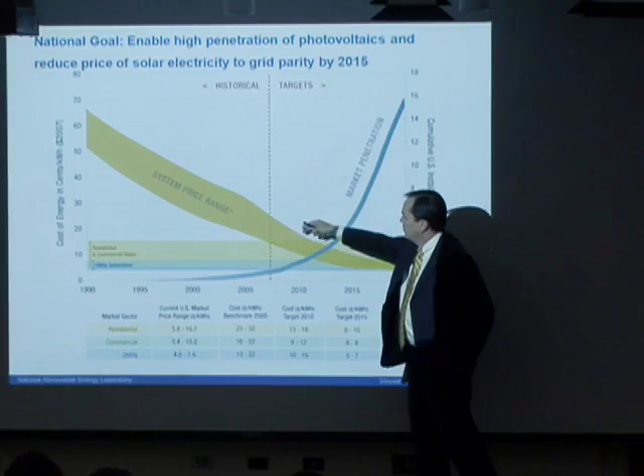I am going to look at the question of what happens as we begin to grow this industry fast enough to become significant. So let's first take a look at the national goal of what we hope to do. Today, photovoltaic systems can provide electricity in the range of 20 to 30 cents a kilowatt hour in many locations around the United States.

I guess I should practice using the pointer. So that is a number that's about a factor of 2 above where we want to be for residential electricity prices. Commercial systems are slightly lower than that. And on the utility scale side of the meter, the numbers need to be substantially below that. So we're a factor of 2 to 4 away from where the technology needs to be to run without any kinds of subsidies.

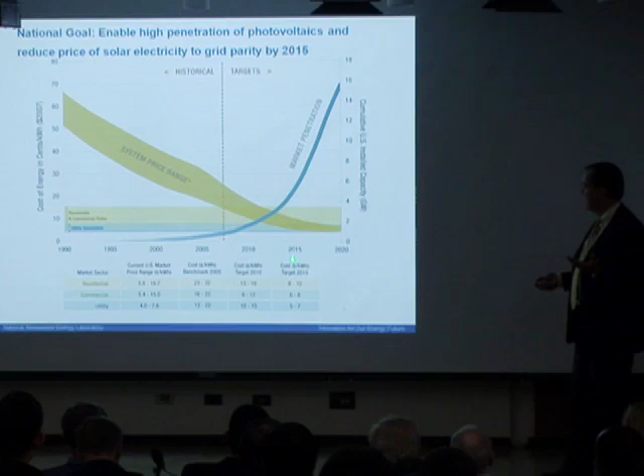In the fall of 2008, Congress passed an 8-year investment tax credit that provides a 30% subsidy for the installation of photovoltaic technologies. Interestingly, that's going to expire around 2015, which is where our targets are. So the idea is that about the time that tax credit's expiring, we expect that PV will be at a stage where it can run on its own.

Many people in the industry think that for some markets in the US, they'll be able to beat that target substantially. And certainly with the recent price drop on PV systems throughout the country as a result of the current economy, that potential is looking quite promising.

But even with this sort of a model, you see that the projected penetration here is only looking at a number of about 16 gigawatts overall.

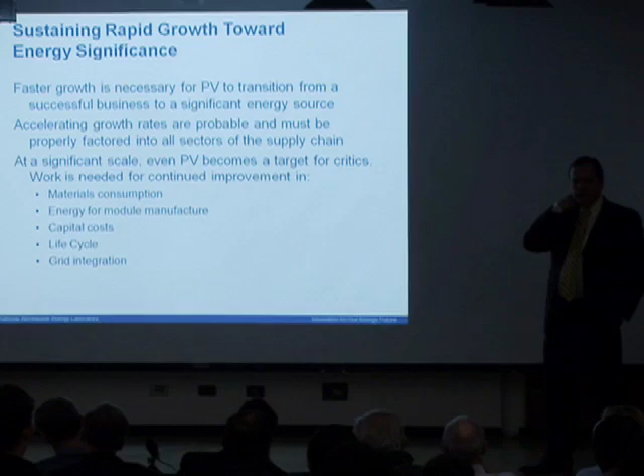We'll look at the energy consumption for a module. Typically today, a photovoltaic module has an energy payback period of about 2 years, which means that with a 30-year lifetime, it provides 15 times as much energy over the life of the module as it took to produce that module. There's some of the challenges of raising the capital cost, life cycle issue, and then the biggest challenge of all: how do you tie this significant amount of power into the grid?

So I gave a summary to one of my hosts here and said, as you look at it, if we don't make some improvements, I've spent my career working in a photovoltaic technology that will be net cash flow negative, consume more energy than it produces, contribute a lot of toxic materials to the environment, and produce electricity that the utilities can't use. It's a great career so far.

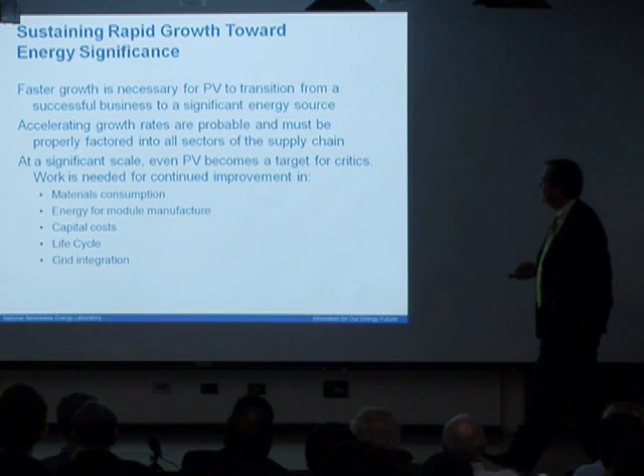But there are solutions out there, and we can achieve those. So we'll take a look at what guides some of the projected growth in photovoltaics and the industry as a whole. This is data from the Energy Information Administration that we'll use to project where we need to be.

It's the old adage that it's important to know where you're headed, because if you don't, you may not know it when you get there, from Yogi Berra.

But here is an analysis they've seen of photovoltaics, and from this 2009 report, they're saying that from an installed base of 30 megawatts in 2006, they're projecting growth to 381 megawatts by 2030. Of course, more than 400 megawatts are installed today. So these are some of the challenges of registering data and projections at the national level in a way that we're all working from the same songbook.

But if you look at the planned growth, the Energy Information Administration expects that electricity consumption growth in the United States will be substantially below that of the rest of the world. As you look at the 40% growth in photovoltaics, within about a decade we should, on a global basis, be approaching about 4% of total generating capacity.

Given that the US is really lagging the rest of the world, and we have a vibrant economic base, I projected that we may be able to grow a little faster than that overall, maybe a 50% growth rate, and steal some from the overall global markets, putting more of it here in the US, and hit a number of 7%, which sounds good until you hit one of the first constraints.

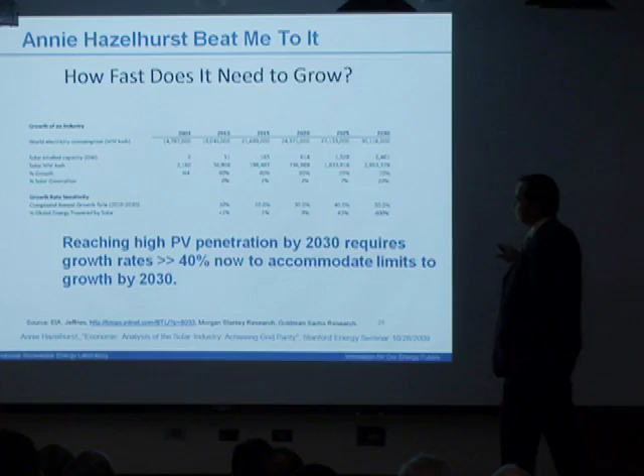But unfortunately, I'm a little late. This was a slide that Ms. Hazelhurst presented at the end of October, where she says essentially the same thing: you need to grow faster than 40% a year now in order to accommodate the limits to growth as you get on out here.

And this model starts with a growth rate around 50% in 2010 and ramps down to the point where in 2030 you're down at a growth rate of around 10%. So the challenge is, can we grow at faster than 50%?

The other thing is that the PV industry has a problem with regard to interaction with the investment community, with the business community. PV has sort of been widely considered to be a visionary technology that's probably not a very good business. The PV industry historically has underestimated its growth rate.

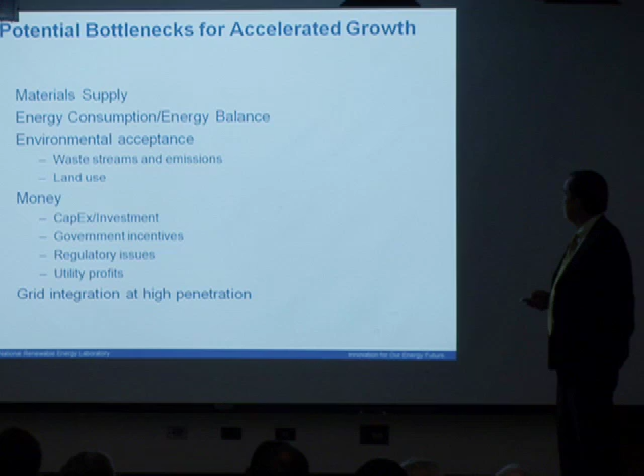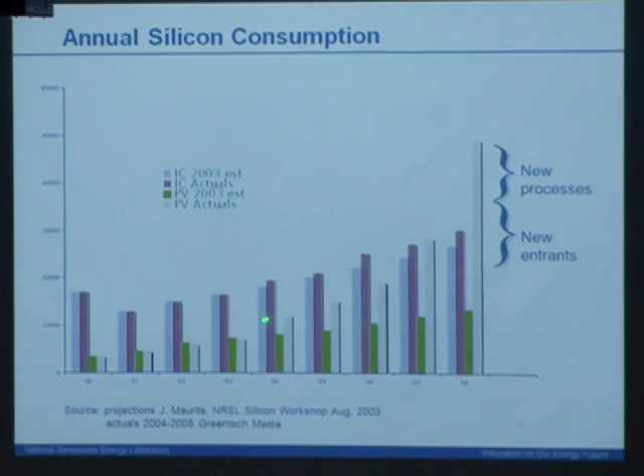What was happening in 2004 is the German government and several other European countries launched these feed-in tariff programs to stimulate the photovoltaic market. The overall industry grew to the point where the demand for photovoltaic silicon outstripped the demand for the ICs. You had a shortage here in 2005, 2006, but by 2008, new capacity, including some new processes for purification of the silicon feedstock, came online to meet that particular need.

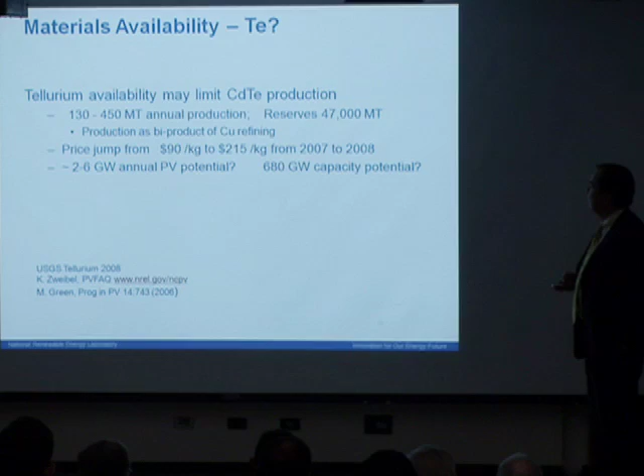Another major technology, one that Mike McGehee discussed last week, was the question of, can First Solar continue to grow as fast as they have? First Solar has been doubling their capacity every year rather than every 2 years for the industry as a whole. 2010 isn't going to see a lot of growth, but Mike's calculation that they probably consumed half of all the tellurium that was sold last year is very likely correct.

If you look at the change in prices of tellurium from 2007 to 2008, when First Solar production went up dramatically, you saw a large jump in that price.

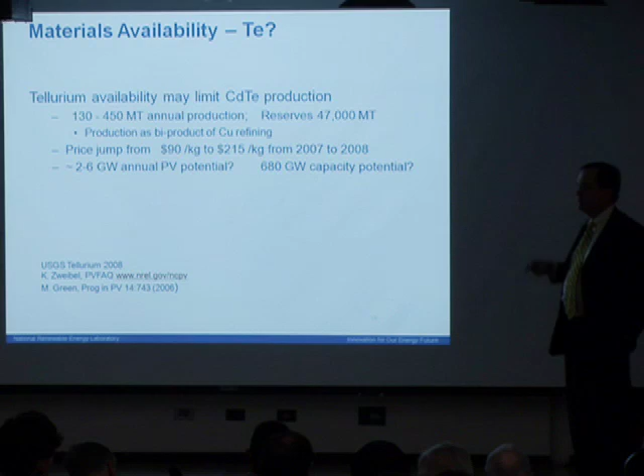So does this suggest that the cadmium telluride technology is limited to 5 gigawatts annually in total production? Or as Mike calculated, only 680 gigawatts? Well, that's a very big number. That's a great business for First Solar for a lot of years to come. But that's still only about 1/5 of the kind of number that we think photovoltaic should be able to provide. Well, there are a few things wrong.

A lot of this information is coming from the USGS, and the USGS is actually collecting and reporting data primarily from suppliers. If you look at their analysis of tellurium supplies, it's all coming as a byproduct of copper production.

Well, an interesting thing happened in 2008, when a company called Sichuan Apollo Solar discovered a completely new geology from which they extract a lot of tellurium. It provides an alloy of bismuth telluride that's quite abundant. Their plans as a corporation is to add another 50 metric tons a year to annual production of tellurium.

The other feature is this volcanic source opens up a completely new geology so that you can look for this material in other areas. And I think as Mike mentioned, the amount of tellurium in a cadmium telluride module is very small, so you can pay a lot for the tellurium in order to make more sources economically extractable.

But digging a little further into the USGS database, you take a look at bismuth, the other side of this particular compound. In 2002, their base reserve number for China increased by an order of magnitude. It's also, you notice, an order of magnitude bigger than the entire tellurium reserve, and yet this is a compound that is a one-to-one mixture of the two elements.

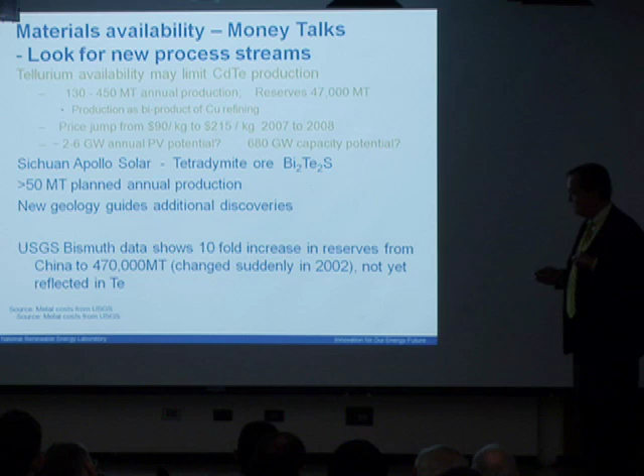Another side of this is that if I've got valuable materials in my module, that will also encourage recycling of those modules so that they're not left out in a disposal site. But the caveat is that you want this to be a small percentage of the total cost of manufacturing a module. Remember, we're trying to make photovoltaic modules for a total price well under $1 a watt. So for materials like cadmium, tellurium, selenium, gallium, and indium, contribution costs of 1 or 2 cents a watt are certainly in an acceptable range.

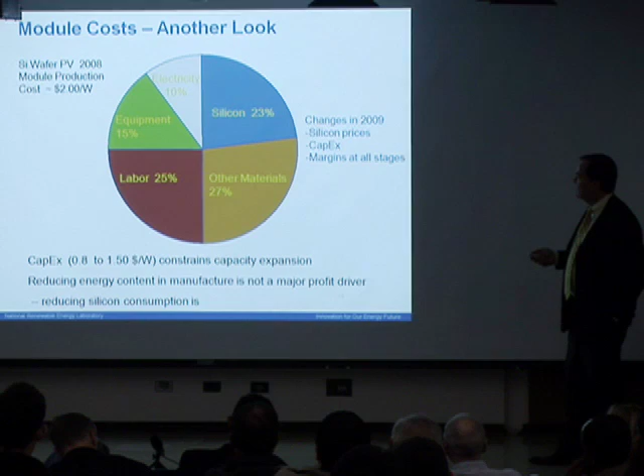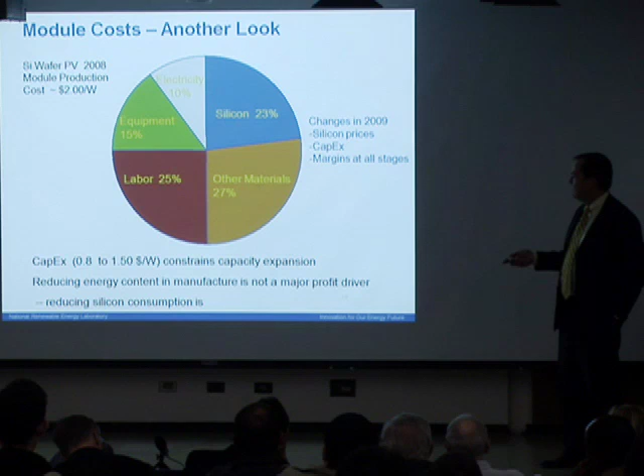But there are a couple of factors that really have a greater impact on the growth rate for this technology. The first is electric consumption, which we'll talk about later. The other is the cost of equipment. In this case, 15% of the cost of that module is due to the depreciation of equipment over a 7 to 10 year life of the factory. So what we're looking at is capital expenditures of 80 cents to $1.50 a watt for installing a factory.

So if you're building a 100 megawatt factory, it's going to cost you $80 million to $150 million to build that factory. This is a factory that's going to generate profits of maybe only $50 million a year. So you're going to be continuing to sink more cash into your industry in order to sustain a growth rate for the overall production.

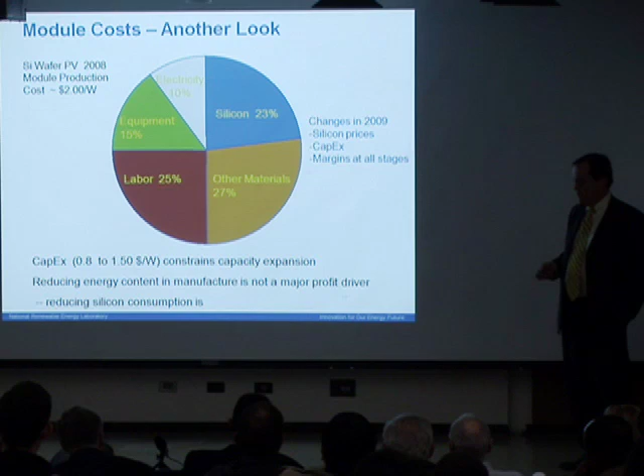The other factor that concerns me a little bit is with electricity being only 10% of the total cost of the module, this isn't a real big driving factor for bringing down the overall cost. But what we'll see is that in manufacturing a silicon module, the dominant energy consumption comes from making the silicon feedstock and the ingot.

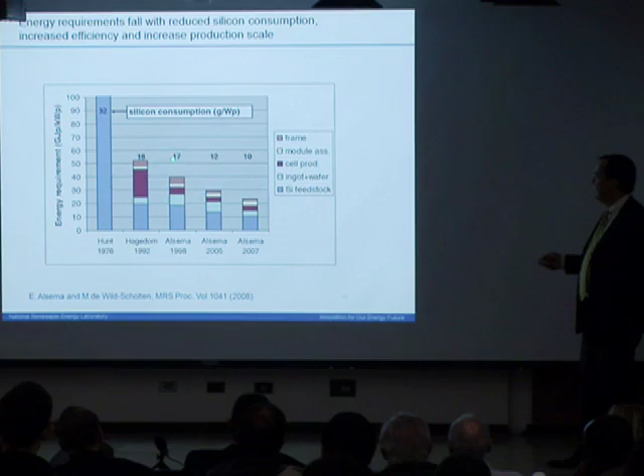As we look at the progress of the PV industry over the past 15 years, in the mid-1990s we were using 15 to 20 kilograms of silicon per kilowatt of module production. By the mid-2000s, that number was down to 10. Best in class today is under 6. So that driving force of knocking the cost of silicon out of the module is also knocking a lot of the energy intensity out of manufacturing that module.

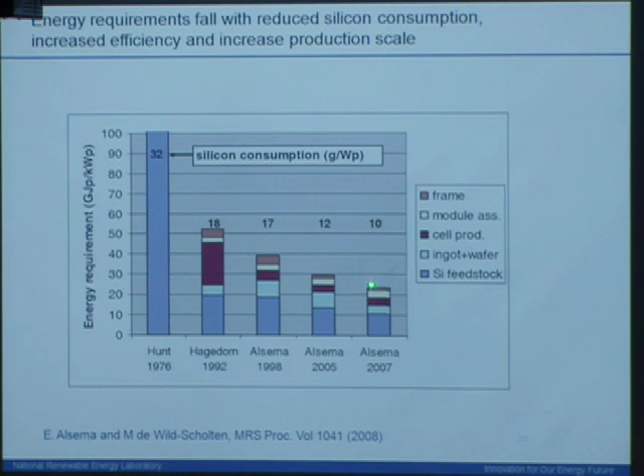But let's take a look at where we would be. This figure of gigajoules per kilowatt peak corresponds to an energy payback period of about 3 years. If you use that 3 years and look at what this industry would do to the overall generation of electricity in the US, we're plotting the annual deployment of photovoltaics from something currently negligible, a few gigawatts a year out of 1,000 gigawatts total capacity, ramping up at a steady rate of 40% a year until it begins to cap out at a number equal to the increase in total electric capacity for the country.

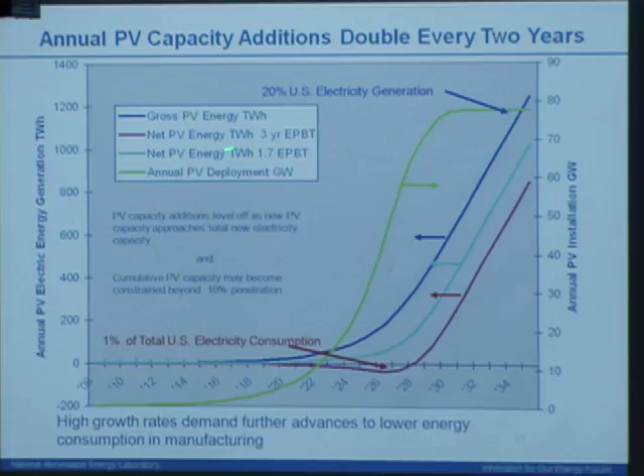So the key is we need technologies that drive that energy payback period down. As I indicated, newer silicon modules produced today would be closer to this number, which is a nice generous contribution, but the net production is still substantially below what the gross delivery from the PV modules would be by themselves.

Again, a company like First Solar is claiming that their energy payback period is now well under 1 year, about 0.85 years. So there are some advantages in thin film technologies, as there would be in organics or quantum dots or any others that don't need to melt large volumes of semiconductor material at high temperatures, to reduce that energy payback period and remove one of the barriers to rapid growth.

Which technology did First Solar use? They use a thin film cadmium telluride deposition technology.

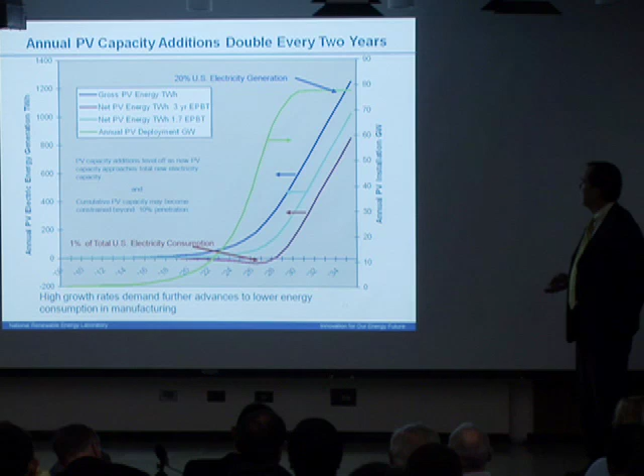We'll now move on to the question of what the manufacturing, delivery, and disposal of photovoltaic modules do to the environment. Here, the PV industry is becoming a cleaner and cleaner industry, for one simple reason: the largest part of the emission footprint is from the carbon produced by the energy consumed in the manufacturing of these photovoltaic modules.

We're looking at a module here with a payback period in the silicon module between 2 and 3 years. The First Solar or cadmium telluride technology could be less than half of that. But the other contributions are relatively minor. The balance of systems would include some of the cost of transporting that module to the point of its final application.

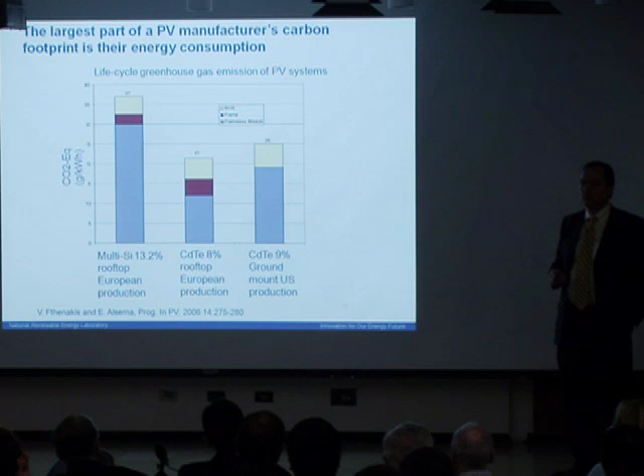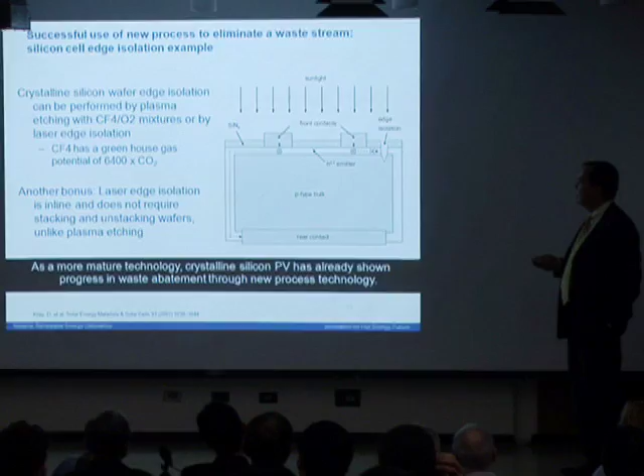In other areas, you look at some of the processes used in turning these semiconductors into active devices. One of them is edge isolation. As you make the photovoltaic device, you put it in a diffusion furnace that diffuses a junction all the way around the device, so you'd end up with something you can't extract any electricity from. So they do an edge isolation etch.

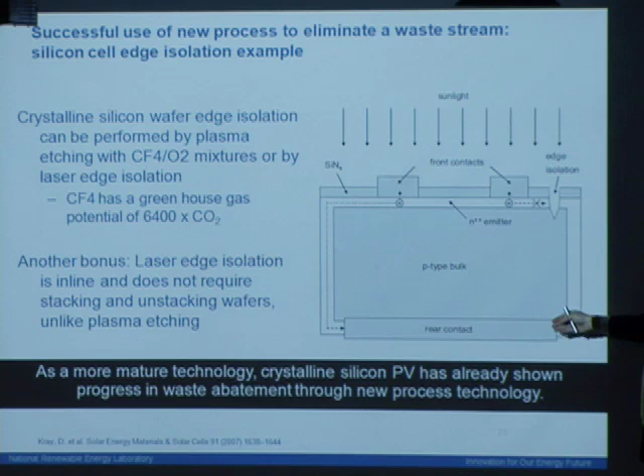In the conventional way, you would stack all the wafers together and etch the entire side off in a plasma etch using CF4, which has a very high greenhouse gas potential, about 6,400 times greater than CO2. That's been replaced now by using a laser etch that just trims into the edge of that device, and it also substantially improves the throughput of a manufacturing plant.

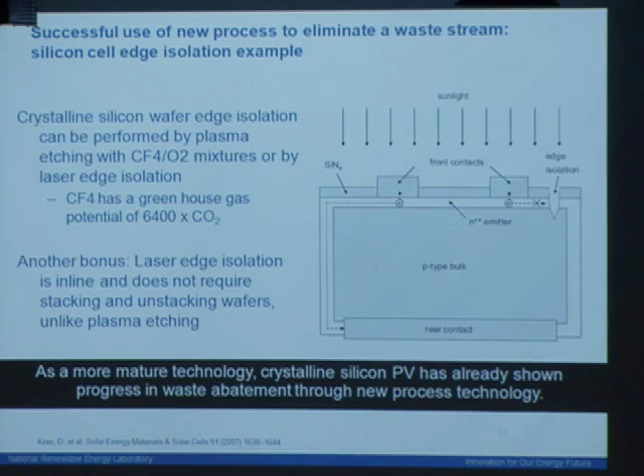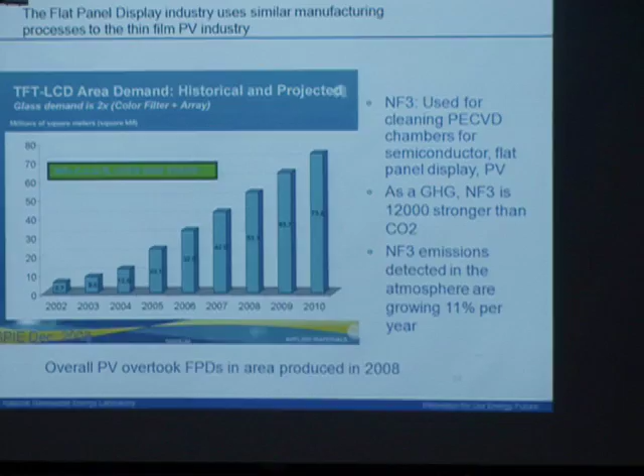But as a process of cleaning up that reactor in between deposition runs, they use nitrogen trifluoride, which has an even higher greenhouse gas contribution than CF4. There's a substantial leakage of nitrogen trifluoride. So now the PV industry, as well as the flat panel display industry, are looking at replacements for that gas in order to clean up their manufacturing equipment between depositions without the impact on the environment.

Finally, this is a more recent issue: throughout all of this, I've presumed that photovoltaics are a popular technology, in that any sort of public relations survey of photovoltaics will find that 80% of the population would like to see more solar energy technology in the energy mix.

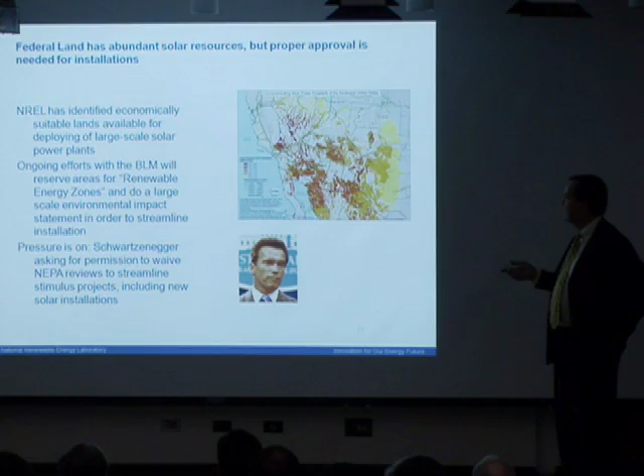Well, that's already changing. In some of the installations intended for desert areas in California, environmentalists were concerned about what this technology would do to the desert environment. I guess one of the questions is, how fast can a desert tortoise sprint from one edge to the other of a 1 gigawatt photovoltaic array? But it's a substantial challenge.

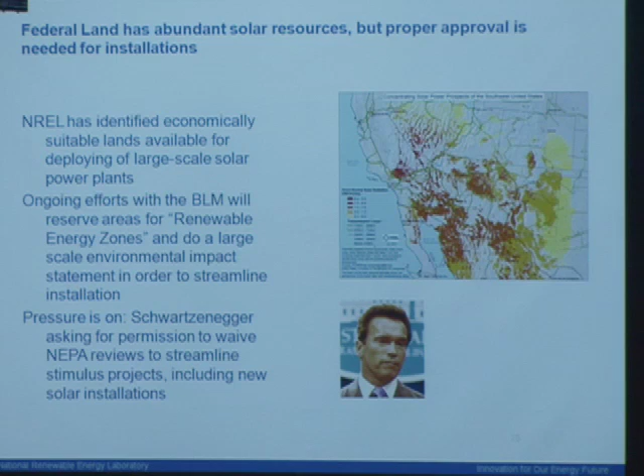So we need to be looking at how these systems can be installed without damage to the native environments. The good news here is that our studies from Navigant and others are showing that in the United States alone, there's easily enough rooftop for about 650 gigawatts of photovoltaic capacity. Remember, today we're less than 1 gigawatt of total capacity in photovoltaics in the US.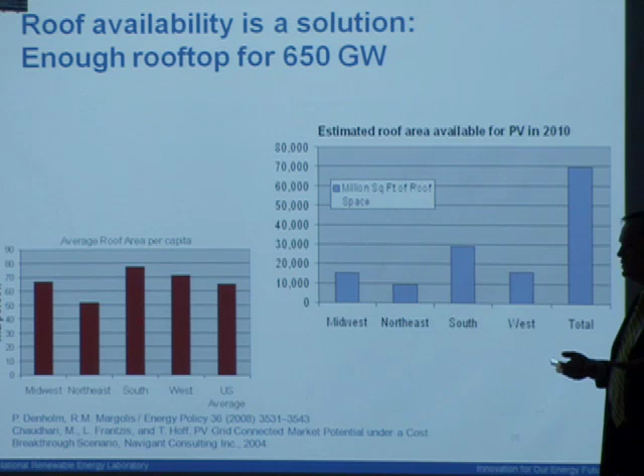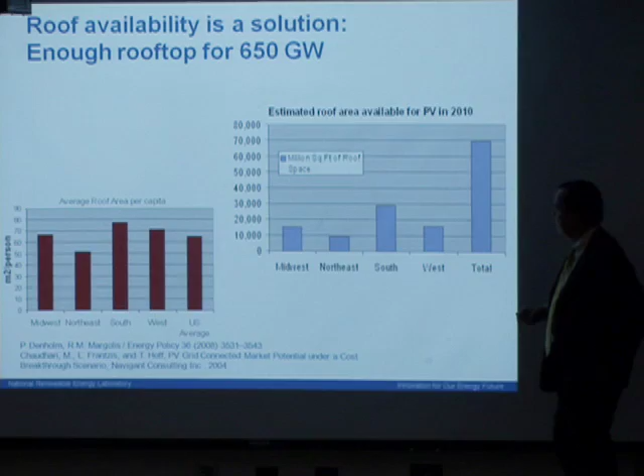That would be enough to provide more than 20% of the total electric generation, even including the fact that PV only runs during daylight hours. Some of the factors in this estimate: a question my colleague asked earlier is, why is the Northeast so small? Well, a lot of those roofs were eliminated because of snow load. A roof in the Northeast may only support 3 pounds per square foot. There's only one technology that can handle that right now: amorphous silicon flexible array. So this calculation has taken into account those types of factors.

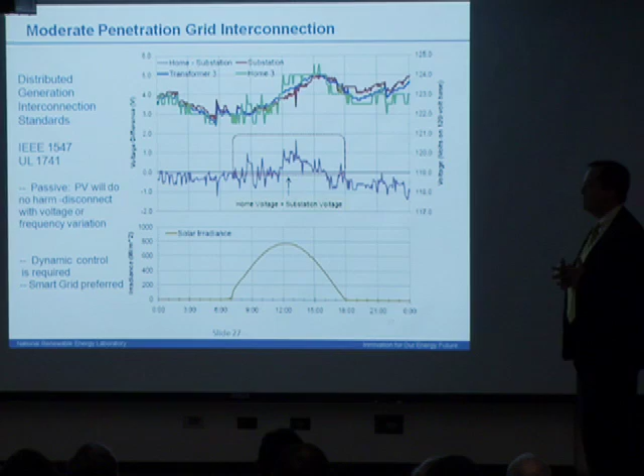Which leads me now to the question of how do we make this electricity usable to the utilities? This is really an interesting challenge: it's taken about 30 years to develop acceptable standards for the installation of photovoltaic systems onto the grid, the interconnection there. The basic standard is that the PV will do no harm. The assumption is that photovoltaics are less than 0.1% of the total penetration, and whatever you do, don't cause us any problem.

One of the biggest questions for utilities is: if you connect a distributed generation source into the grid, and the grid goes down, how can you be sure that your lineman going out to fix the grid isn't going to be injured by a photovoltaic system that's still connected? That's known as islanding. The primary characteristic of current standards is that the photovoltaic system will disconnect with either a variation in frequency or voltage, which is one way of sensing a utility problem.

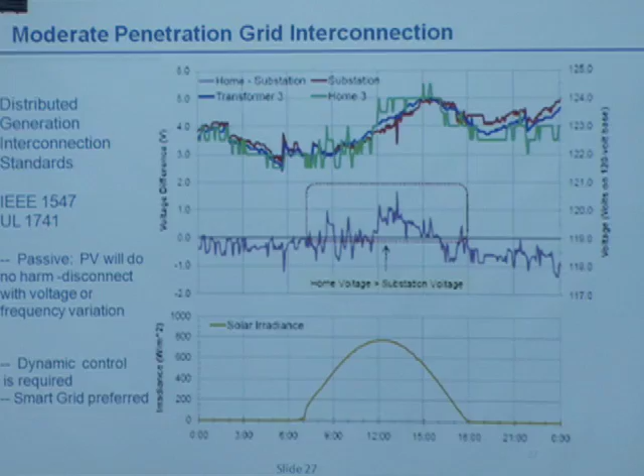Recent improvements now have anti-islanding circuits in all of these inverters. As long as you're less than a few percent of the total generating capacity on a particular circuit, that's fine. But if you're up at 10 or 20%, a change like a photovoltaic system kicking off is going to be more than the spinning reserves the utility has. So at high penetration levels, you need dynamic control and communication in your inverter. Think about it—you've got an inverter continuously sensing the voltage, frequency, and general operation of the grid, at a point where a system the utility didn't even have to buy is connected to their grid.

In many of these systems, they're connected to the internet such that the homeowner can do a wireless check of the performance of every module in their array. And what do we do with all of that information? We kick the PV system off if there's any variation in voltage or frequency. So as the country moves toward a smart grid, you can take advantage of the information smart inverters are already collecting to provide a more stable grid. With inverter technology, you can even use photovoltaic systems to help meet some of the reactive loads that can destabilize a grid driven from conventional sources.

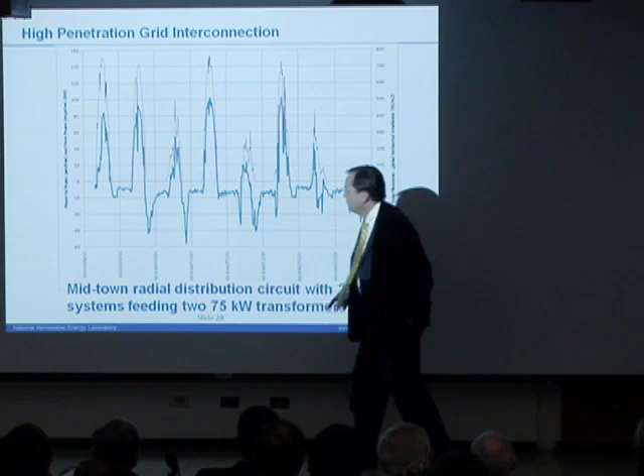Here's an extreme case: a small village with 20 homes feeding into the grid, in a midtown location, with a relatively antiquated radial distribution network rather than the secondary network found in many cities. This village is supported by two 75 kilowatt transformers. Looking at the performance, the red curve is the solar intensity, and the blue curve is the total power delivered or consumed by these 20 homes with photovoltaic systems on them. You can see the maximum output is over 100 kilowatts, whereas the maximum demand is under 80 kilowatts.

So you've got a system that's really bigger than the overall utility. It runs the risk of driving electricity backwards into the utility system. The utility protects itself from that—it has isolation circuits such that if this were allowed to happen, these homes would be kicked off. So in this village, something interesting happened: in order to avoid being kicked off, they actually installed resistive loads to dump that power—in this case, space heaters acquired from Sears. You'll also notice that on the final day, when the sun was very weak, they had no load.

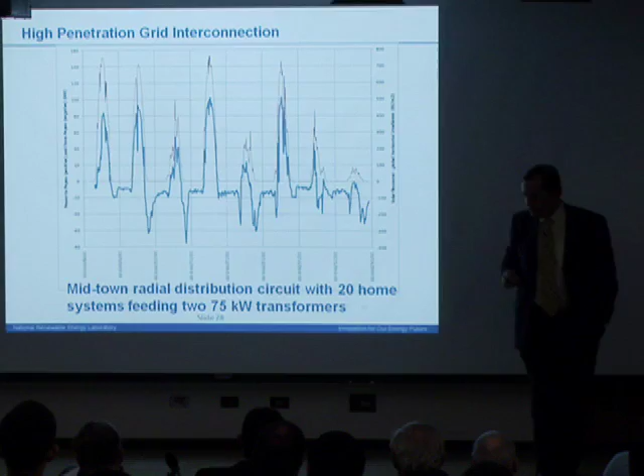Well, this is a particularly peculiar village—this was actually the Solar Decathlon competition in Washington, D.C. last year, which for the first time incorporated grid-connected PV systems as opposed to standalone, battery-connected ones. As a result of that experiment, engineers at NREL, DOE, various universities, and PEPCO began to understand a little more about the challenges of interconnecting photovoltaics at a high penetration level into the utility grid.

So in conclusion, I'd like to remind you that we're a vibrant industry. It's a rapidly growing business that at this stage isn't providing a significant amount of energy, but it can grow fast enough to do that. As PV makes this transition from its business success, a number of stocks have done very well over the past few years, although this year they haven't been immune from other problems.

As we move toward larger scale, toward energy significance, even a technology as apparently benign as photovoltaics is going to have some pretty large targets on it for critics. We need to be proactive about removing these targets, and the good thing is that many of the steps needed to reduce the cost of photovoltaic technology, reduce capital expenditures for manufacturers, and reduce energy consumption all go hand in hand with making a lower cost, higher performance technology. So we don't have trade-offs here—we just need to move a little faster.

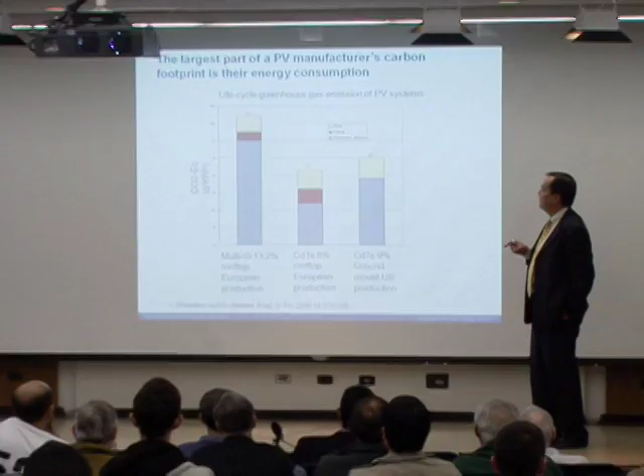Okay, so what you're looking at is the carbon dioxide equivalent greenhouse gas emissions over a life cycle analysis of the PV systems. This is work that's been done by Vasilis Fthenakis at Brookhaven Laboratories. He's organized a number of symposia on the life cycle analysis of photovoltaic systems, one at the MRS in 2006, and then most recently at the IEEE Photovoltaic Specialist Conference this summer in Philadelphia.

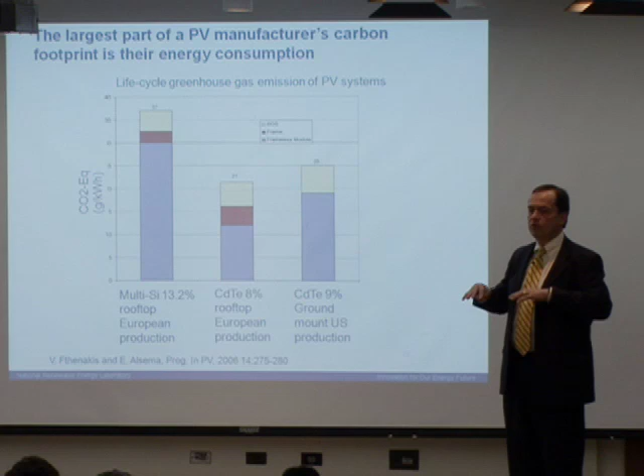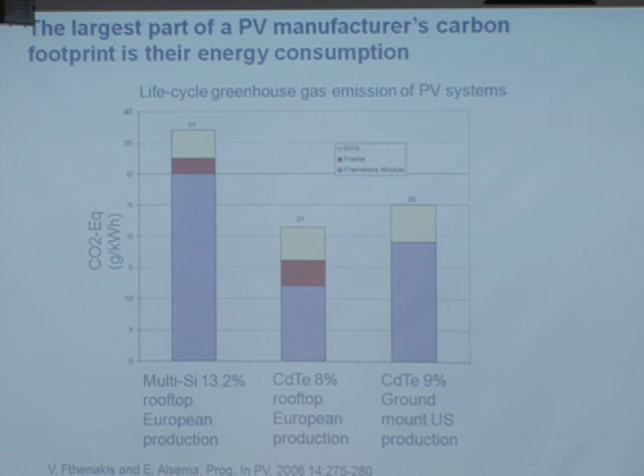So what he's concerned about is, if you take a look at the life cycle from how you manufacture these to how you dispose of them, how can we reduce our environmental footprint? So what we're looking at here is essentially the energy payback time of a photovoltaic manufacturing process, but now quantified in terms of the amount of CO2 that would be emitted from the energy sources used to produce these. One of the things he's actually done is analysis comparing the production of a photovoltaic module in China, where the CO2 emissions per kilowatt are higher than in the US. So he's looked at this geographically as well.

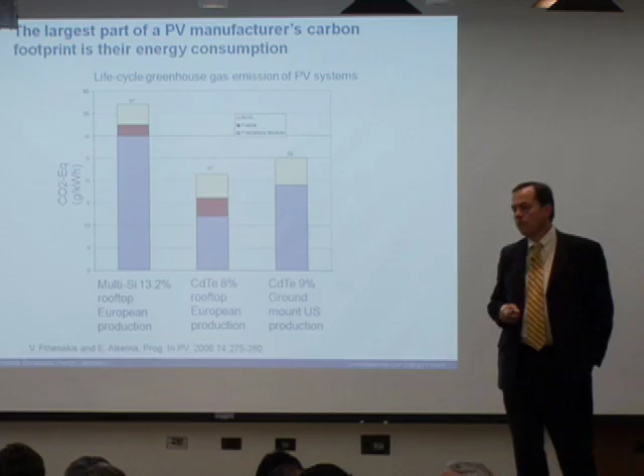So is smaller better? Smaller is better. So why is a European system with frame in a lower light production environment and a lower efficiency module getting a quicker payback than a ground-mount US one with roughly double the sunlight?

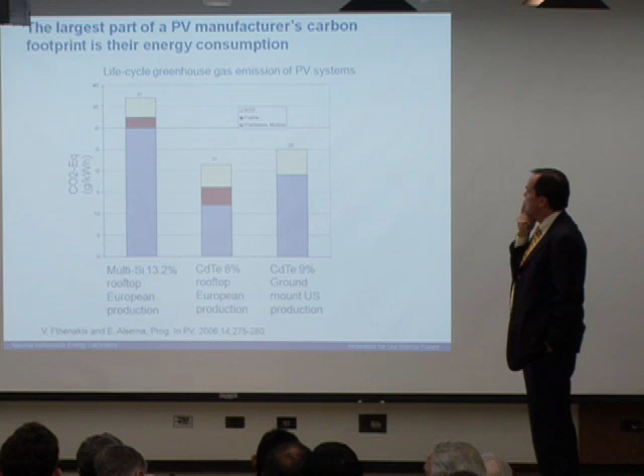I don't know. I don't know the answer to that. I was going to say it would be the steel in the frame, but the balance of systems cost here is about the same. I mean, the steel and support structure for a ground-mounted one versus the rooftop — but that's not consistent with the fact that there's a balance of system component up there, which would include the frame.

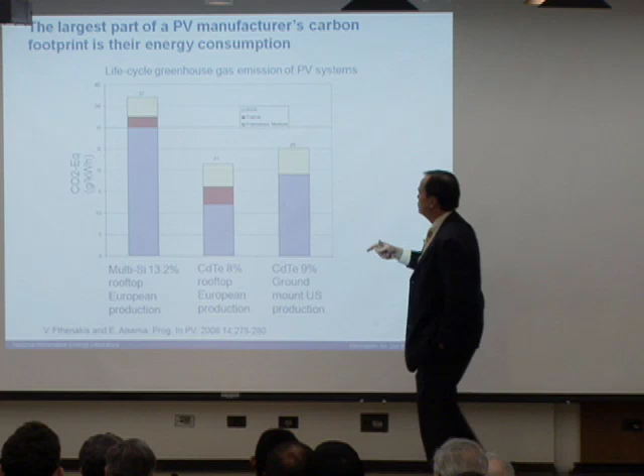There's a huge difference in sunlight levels as well. This one was for a southern European location where the difference wasn't as great as it would have been in Germany. So that's not the factor. I think that the difference may be showing up here in the deposition process for making the cadmium telluride.

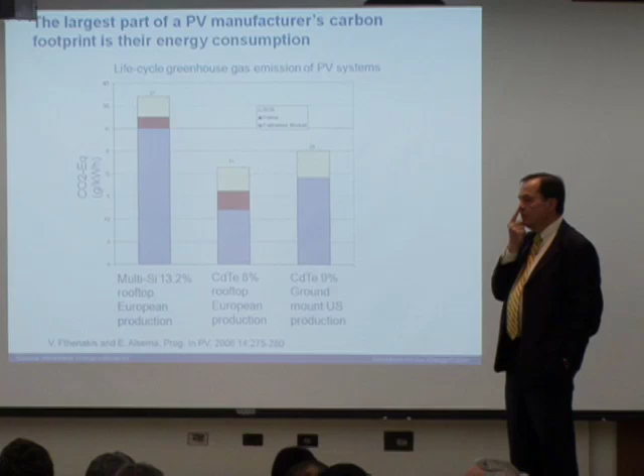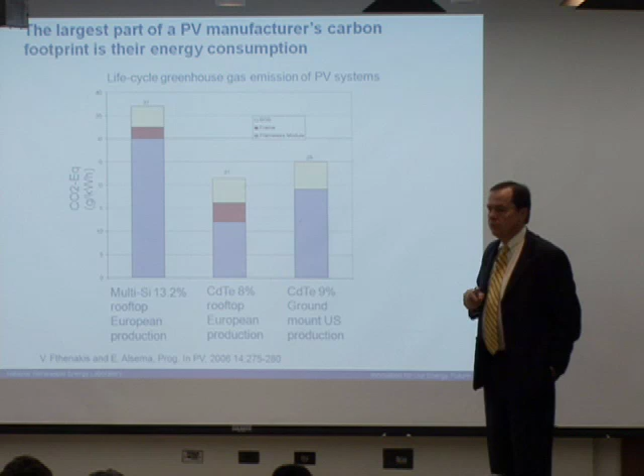Is it due to the assumptions on the energy mix in the US and in Europe? That would be a part of it. But I think the bigger difference is that this module may be a single glass module with a polymer backing, and this is a dual glass module, and most of this energy is actually for the manufacture of the glass. So they're not the same — different manufacturer. This one would be like from a company I think was called Antec, and this would be First Solar. But that's a guess, I don't know for sure.

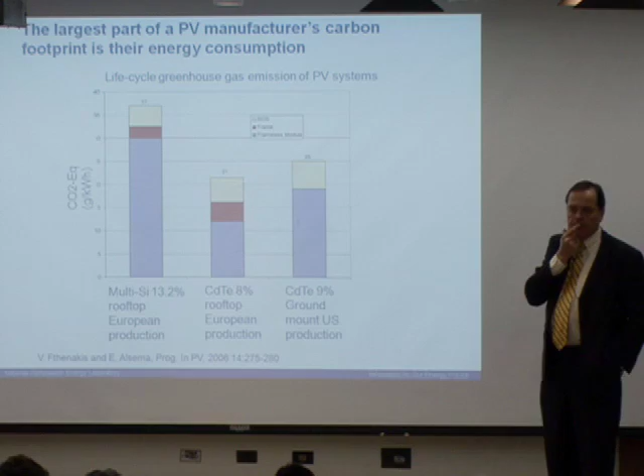Is the assumption that the energy use in manufacture is equivalent to the country average really valid? I mean, we used to produce aluminum in the Columbia River Valley off of basically surplus electricity from hydro. Isn't polysilicon, and at least aluminum for the frames, also produced from cheaper electricity sources? Yeah, but this is kilowatt per kilowatt. If it takes — I mean, the photovoltaic module cost analysis I had, 10% of the cost of the module, or about 20 cents, is involved in the electricity.

So that was actually an analysis. Yeah, so the cost of it is in there, the CO2 cost should factor in. That's what I was saying — NREL has also looked at this analysis depending on whether it was made in an average location in China, average location in the US, or average location in Europe. Certainly, if you did your PV manufacturing with hydro, that would help this balance quite a bit.

What percent of the modules are made in the United States today, and what percent are projected to be made in the United States in the future? That goes back to one of my very early slides. The total U.S. production was only about 300 megawatts out of the 6 gigawatts last year.

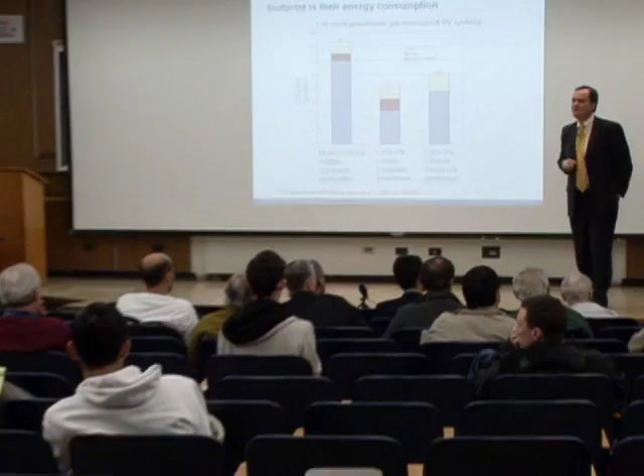Okay, back there, last one, then we'll wrap up. On the slide one or two before this, what are the assumptions in growth rate? Is it steady, doubling every two years, 40% a year? It's a 40% annual growth rate, which is not really realistic as you get further out.

That was my point earlier, but as you can see it tapers off here—growing at 40% a year through this period. Based on analysis that Annie Hazelhurst did, you can't maintain 40% growth as it becomes a significant portion of total generating capacity. So I flattened it out to the point where in the final years you're adding capacity that just equals the total new electric capacity for the US. When that begins to flatten out, PV systems contribute vast amounts of electricity, because you're no longer building the factories that consume the electricity that last year's modules were producing.

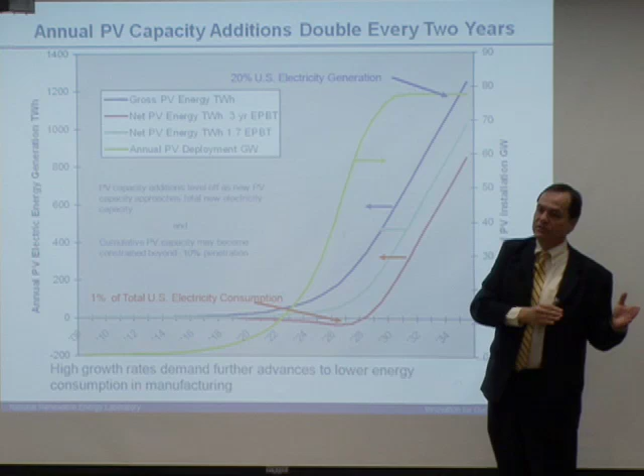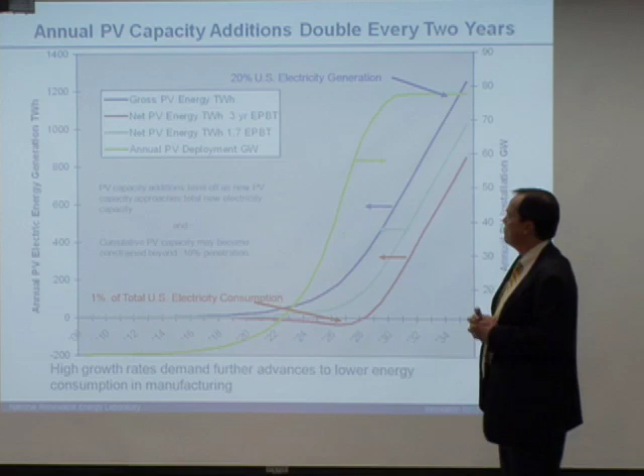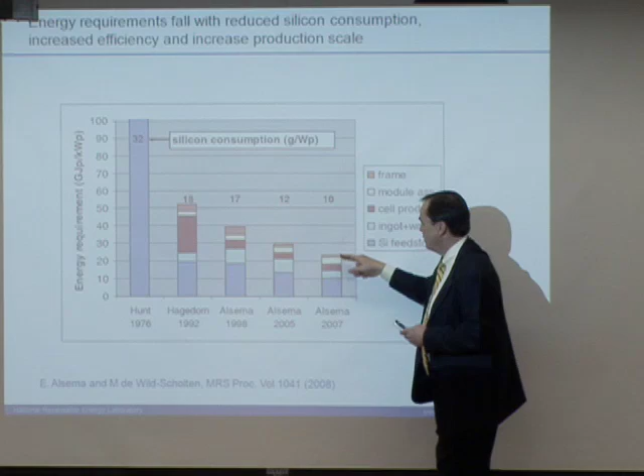It's also perhaps a little pessimistic to assume the energy payback time stays as high as 1.7 years—it should be steadily coming down, right? It has been. That was the slide I presented, where it dropped from about 6 years a decade ago to about 3 years, and today that's more like 1.7. So it is coming down fast, and thin film technologies, at least Cadmium Telluride, are under 1 year.

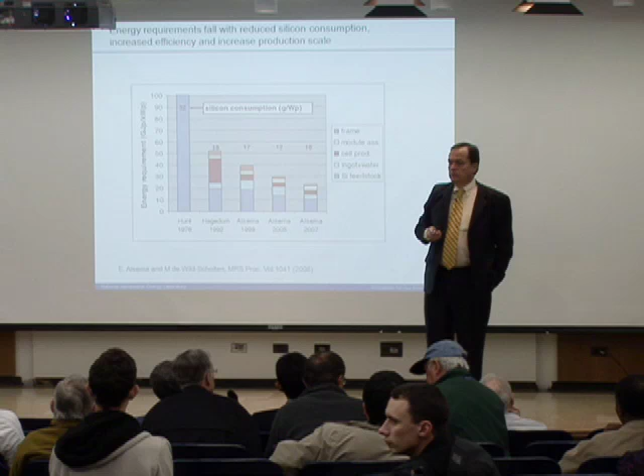And that's just for the module? That is just for the module. Well, actually this one includes the frame, but it does not include the balance of systems, so that would add another small component on top. The balance of system being the copper wire to connect them and the structure to hold them up in the wind, which will become a growing fraction as the module shrinks—steel isn't getting a lot less expensive to make, so yeah, it becomes a growing factor. That begins to put a bottom on where you can get.

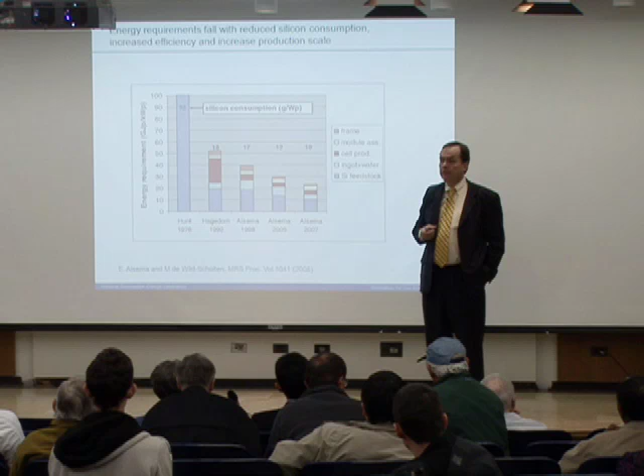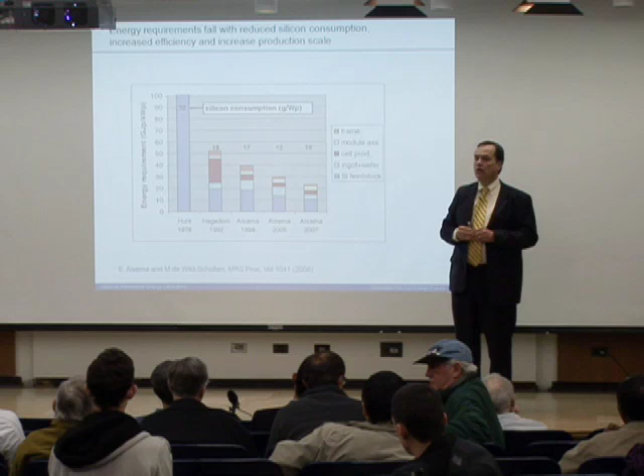But then the efficiency of the module changes. If you start making 20% efficient modules like SunPower is doing today, you need a smaller structure to create the same amount of energy. So bringing the efficiency up, bringing the energy intensity down, and being smarter about how you interconnect these modules all drives the total energy consumption of putting PV in place to a lower and more acceptable number.

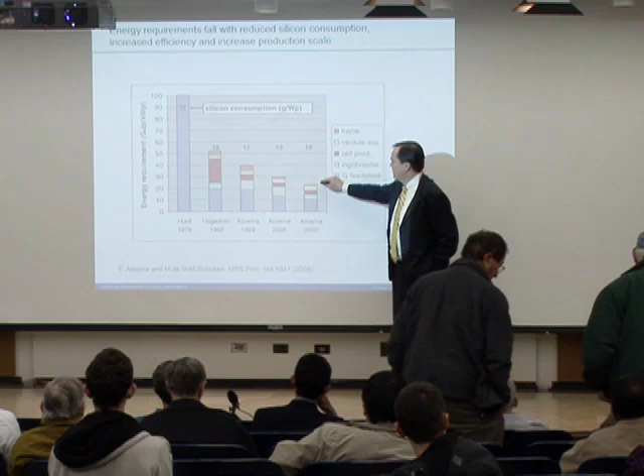Any sense how much of the energy is in the inverter? Very small—smaller than any of these components. The aluminum in the frame is actually more, and most of the energy in the inverter is in making the steel box for it.

Anyway, thank you. Thank you much.